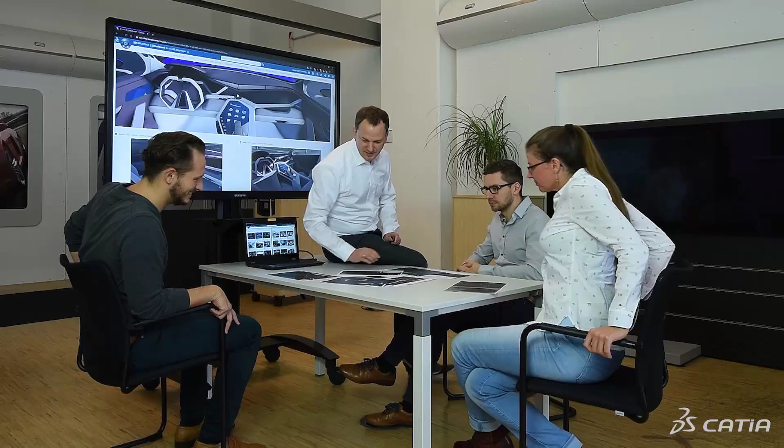When we take a look at modern transportation, we see more than just cars. It is not only about driving or being driven. Autonomous driving, electric mobility, artificial intelligence, those are the topics of the future. A future we want to shape with our Bleu iX Polymorph concept.

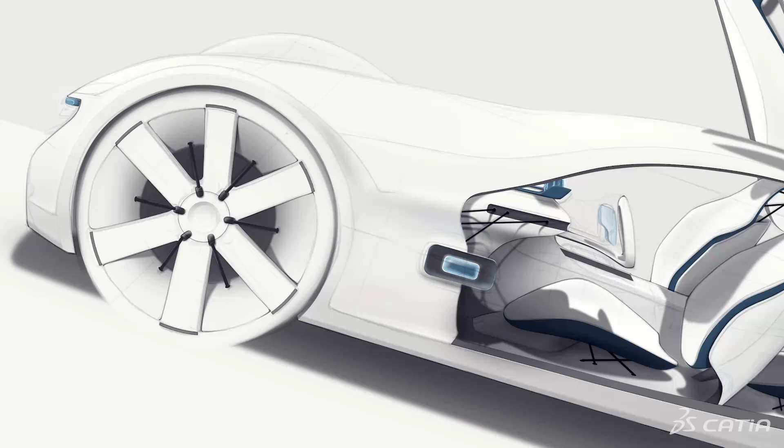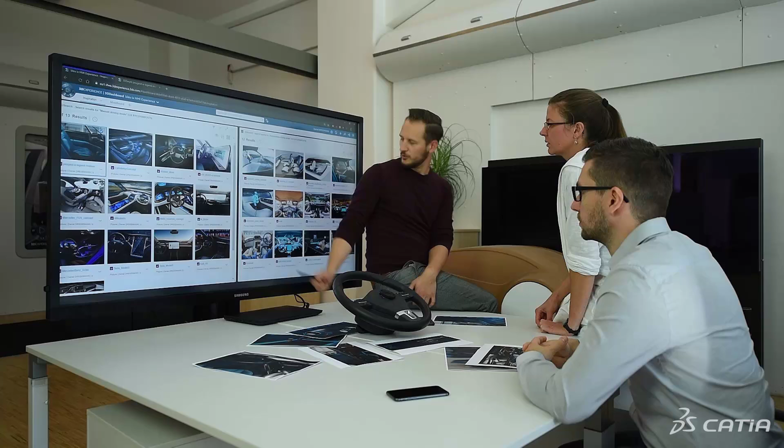Following the hybrid approach of having an autonomous and manual driving mode, we started to explore our ideas. 3DSwym dashboards are one of many tools which helped us to share our thoughts and inspirations easily. We gathered a lot of ideas in brainstorming sessions, so it was essential to have a platform that allowed us to share, organize, and just picture our inspiration. It helped us to collect feedback, make early decisions, and form a common idea about what we want to achieve.

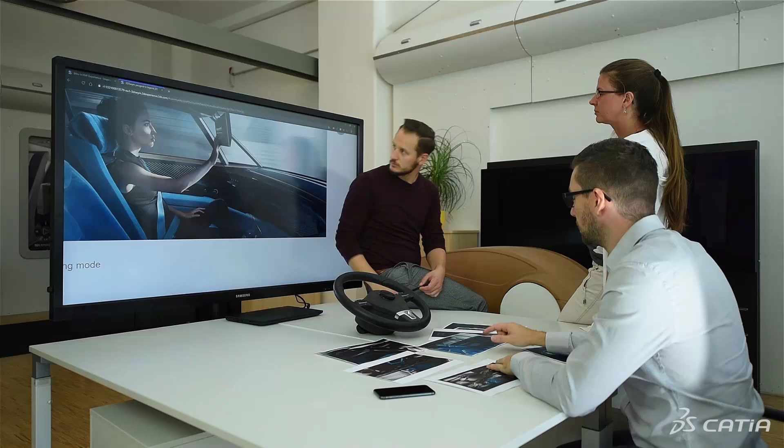With the 3DEXPERIENCE design solutions, we are able to explore a lot of ideas and to find the right alchemy of creativity and technical components.

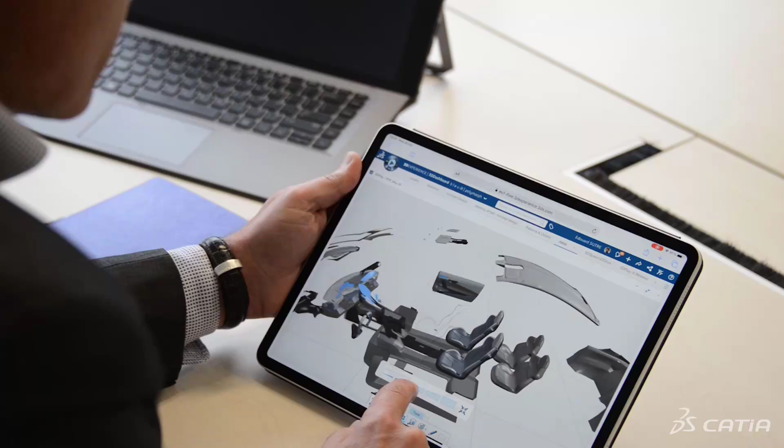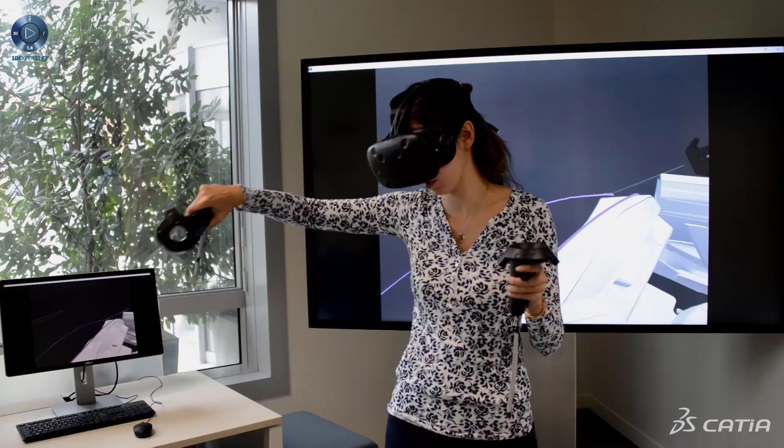It all starts with a natural language of sketching in 3D to explore ideas and express creativity with an ultimate gesture-based design paradigm. Working in a unified modeling environment made it easy and efficient to start sculpting the ideas with powerful virtual clay modeling.

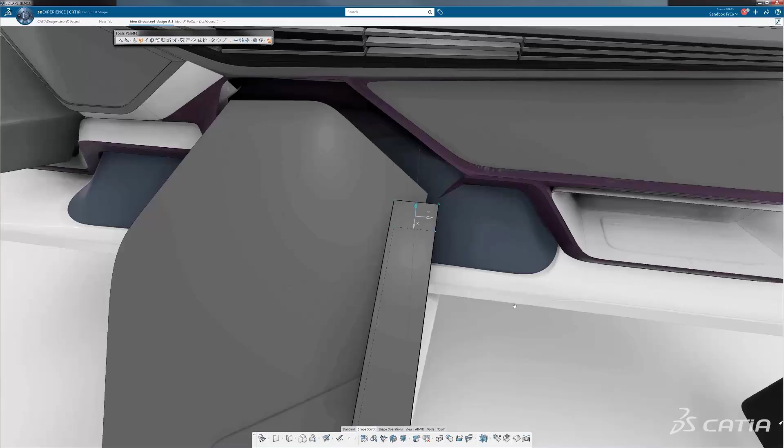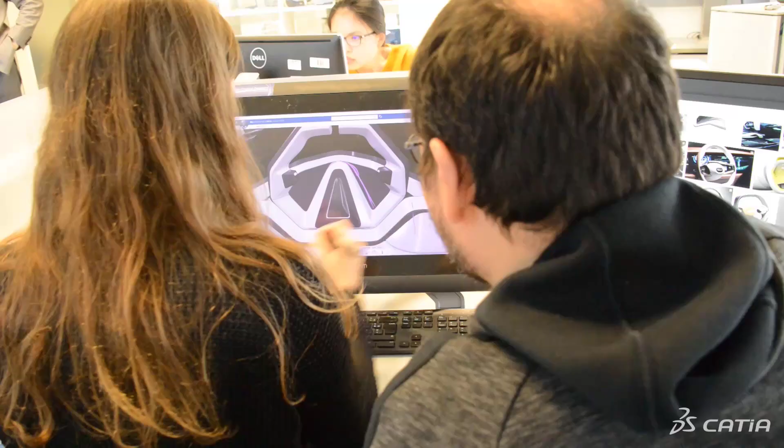Iteration loops between creative designer and concept modeler was then smooth to speed up the design convergence. For us, as designers, new generative modeling approaches were key to unleash our creativity to explore and generate multiple shape patterns.

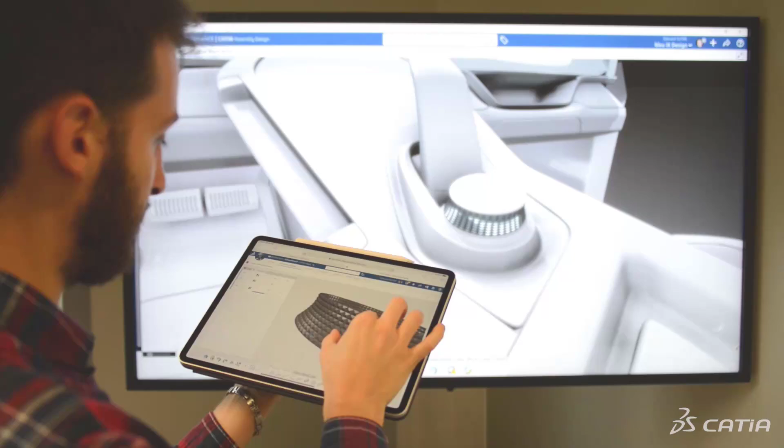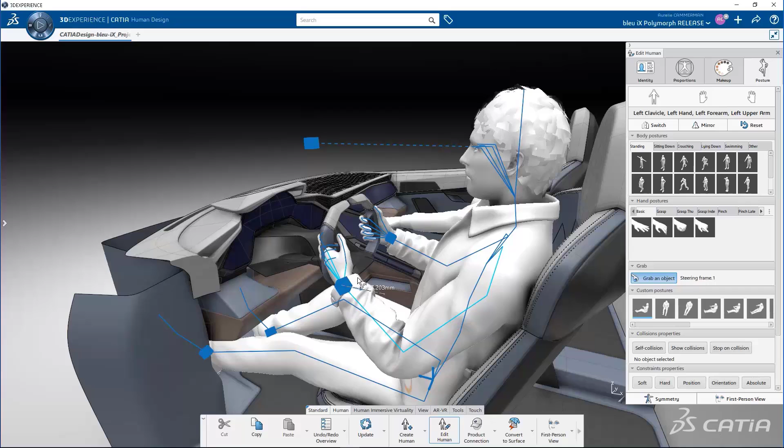In the Bleu iX Polymorph project, being able to visualize and contextualize a virtual human all along the design process was incredibly useful to design the right experience and reach the perfect design to offer the best consumer experience.

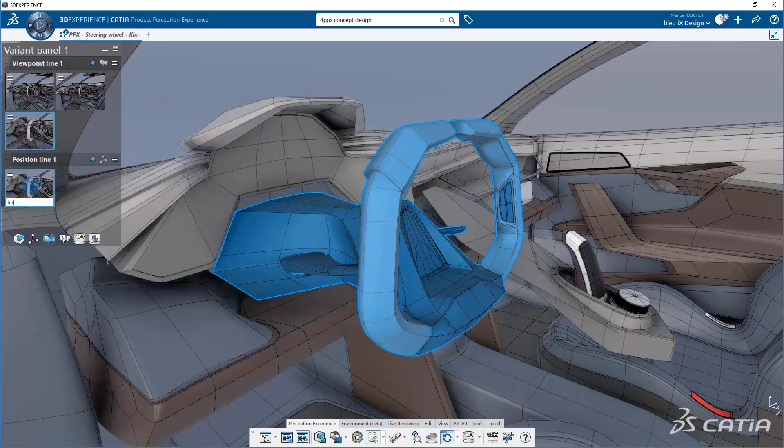Entering the 21st century, mobility is now evolving rapidly. Autonomous vehicles, along with electrification and sharing, appear to be the next big change in the field of mobility. This is redefining the way people will live their mobility experience. A new challenge for interior design.

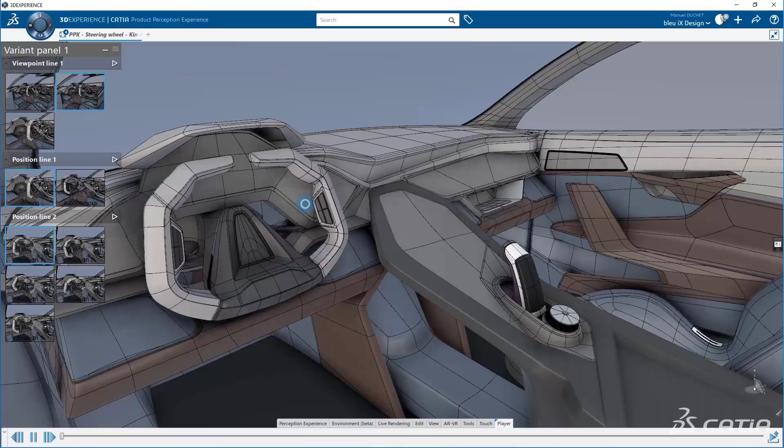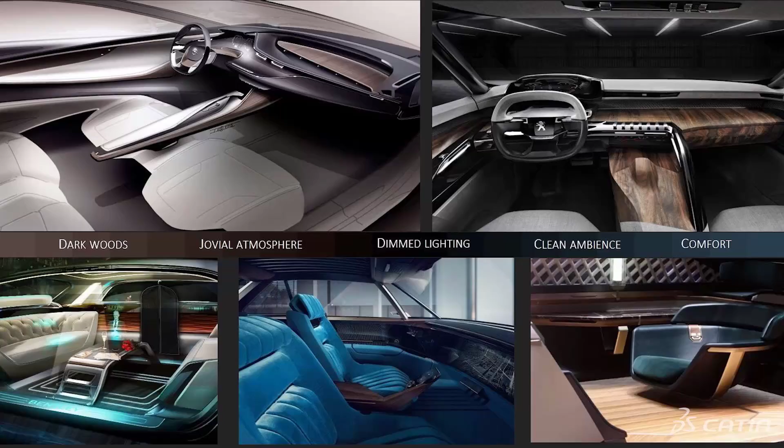The first and maybe most important step is always inspiration. We wanted to combine an aerospace-inspired sports car with an autonomous driving concept, so we had to think differently. The challenge of our design was to find a fusion of performance and comfort. A feeling of power, but also a place where you could relax. In the end, our choice of materials and colors was driven by exactly this idea.

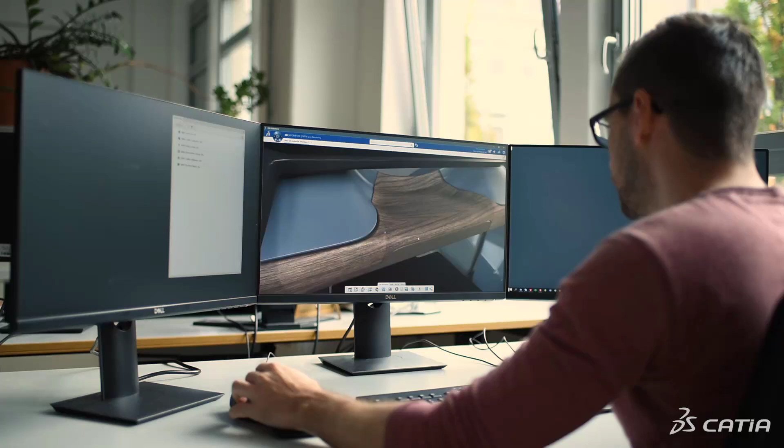To get there, it is very important to experiment. Be able to test different finishes, surfaces, or even small details like stitches on seats or the steering wheel. A big part of this ideation process is actually playing around, finding that certain something that really hits the essence of our design.

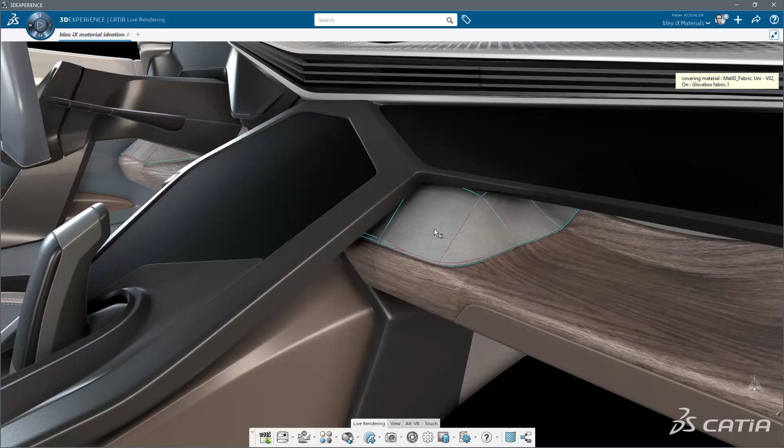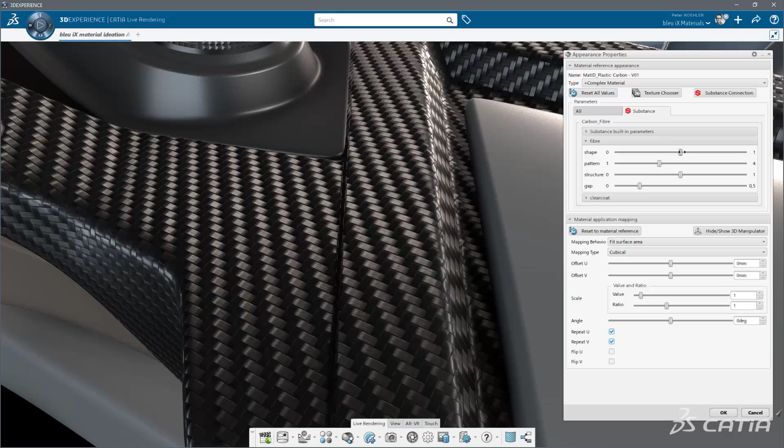We have excellent libraries of materials which allow us to do exactly this. They are physically based, so we can use them in different render modes, and fully procedural, so we are able to create hundreds of different variations in order to find the very single result we are looking for.

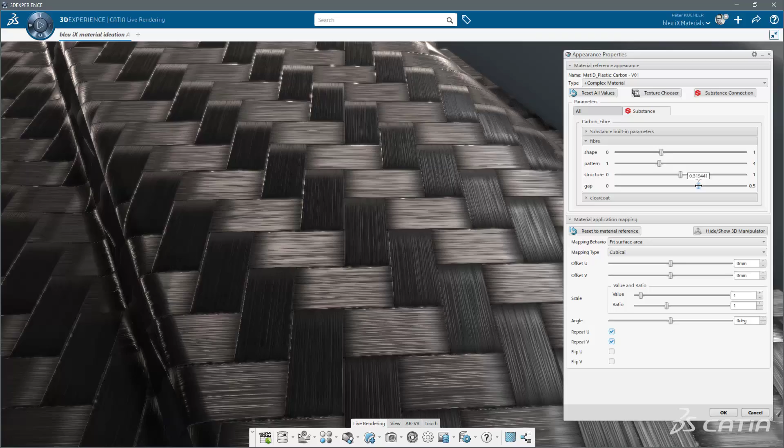The challenge was to bring multiple light sources, direct and indirect ones, into a balanced lighting that matches perfectly with large HMI displays and the initial material concept.

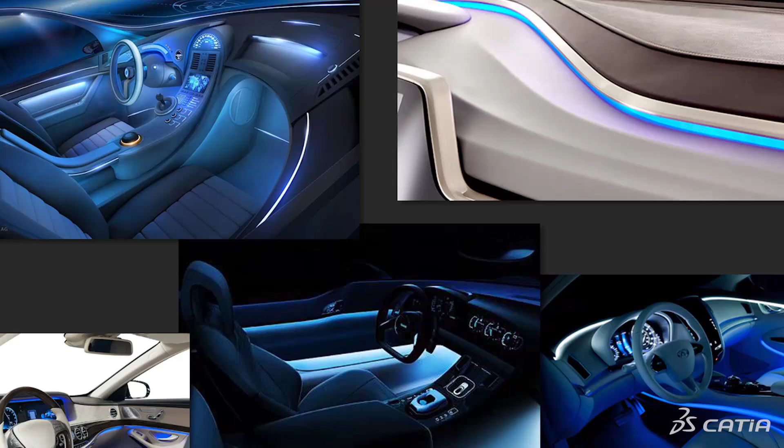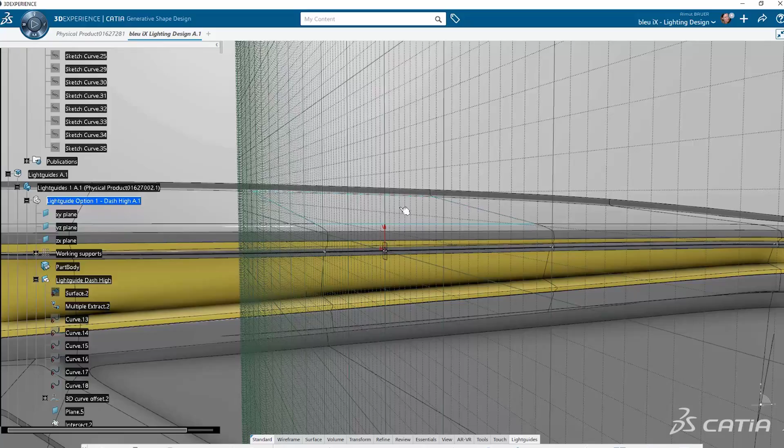To bring inspirations to life, first ideas have to be communicated to the shape designer. Thanks to Natural Sketch, I was able to draw light strokes directly onto the geometry. Due to constant evolution of the design, working associative and parametric is essential. All modifications on the light guides are immediately visible in the rendering.

Aligned to the material designer's concept and in coordination with the HMI designer, a harmonious color palette has been developed and brought to life with renderings and global illumination.

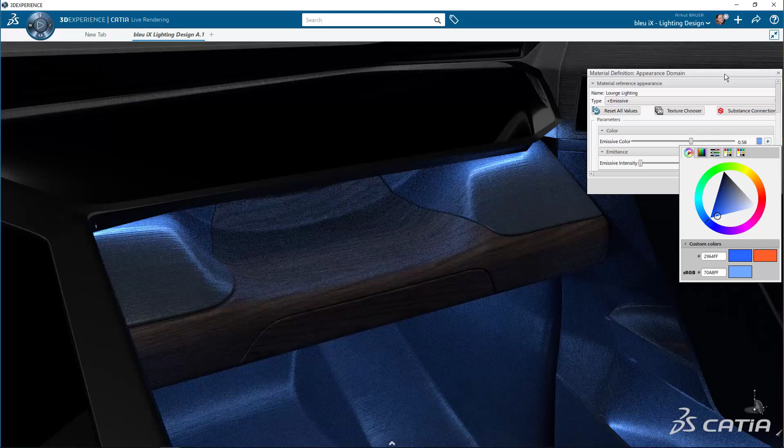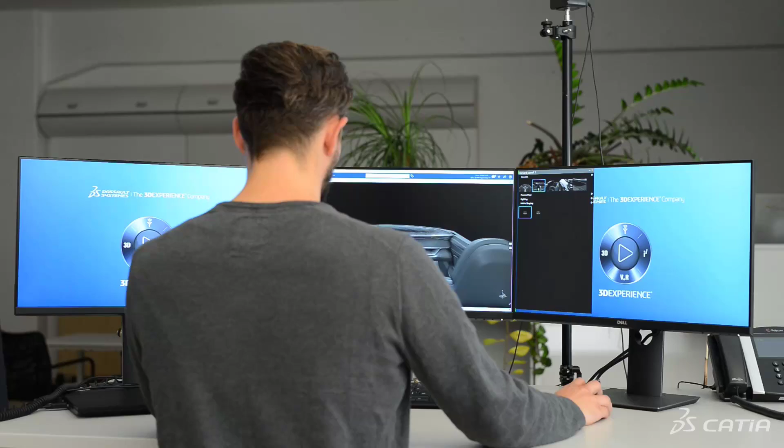In our daily life, we are surrounded by displays. We find them everywhere in all life situations. We had that in mind for our human-machine interface concept. We started working in 3D very early. Exactly this gave us a very good understanding of position, size and orientation of our screens.

It also allowed us to influence the shaping from the very beginning. Despite the fact the initial HMI innovation is driven by the customer's expectation, we began to integrate all disciplines directly from the start.

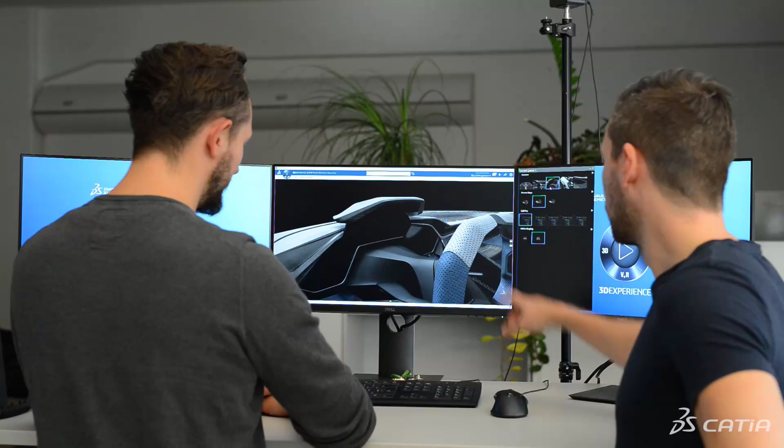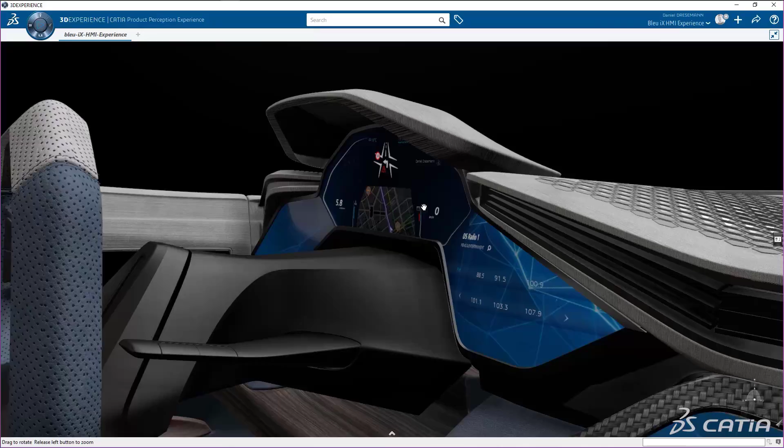Efficient collaboration is mandatory when it comes to creating a convincing experience. So we used inputs from color and trim and light designers in the whole evolution process of an HMI design. Directly integrating the first HMI sketches into our 3D interior got us a realistic impression of our complete experience.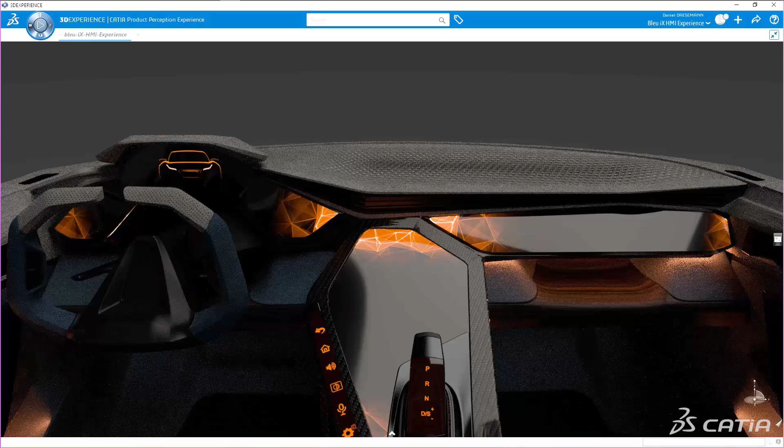The point at which our vision becomes visible as a whole, with all its complexity, materials, lighting, and rendered in high quality, that is a very exciting, if not one of the most exciting, moments.

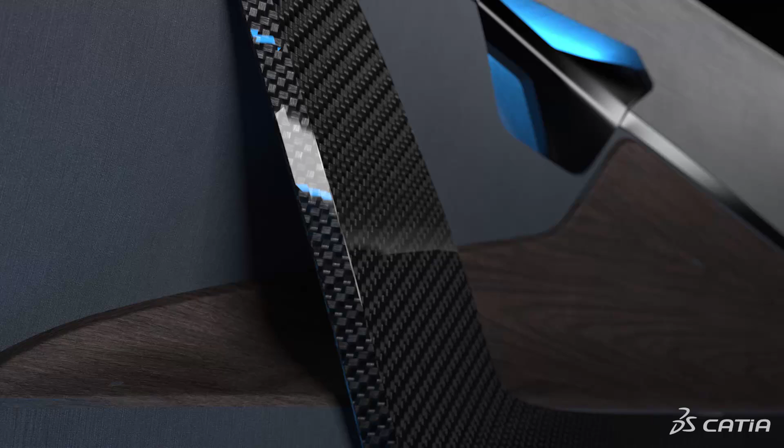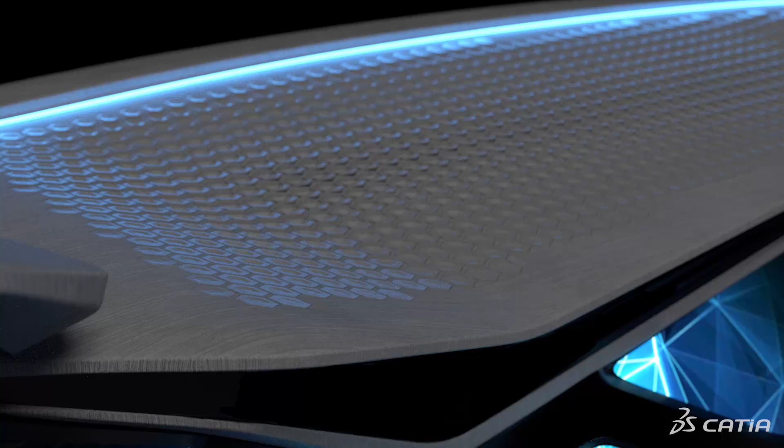This is when finally everything comes together. Shape design, materials, interior lighting and HMI. Visualizing our vision in this quality makes design and especially communication of design so much easier. There's less space for interpretation and therefore less space for miscommunication. Because in the end, it is important that everybody shares the same idea of design, the same vision.

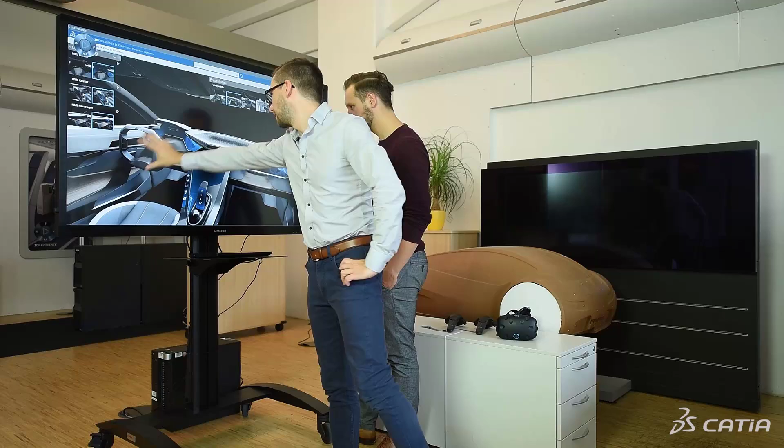In the end, design comes down to one very single point, which is we have to make decisions. Fortunately, with CATIA, we have the right tools in place to present our complete ideas with all points of discussion, variations, everything together in one single review session, on desktop, in front of a presentation screen, or even in VR.

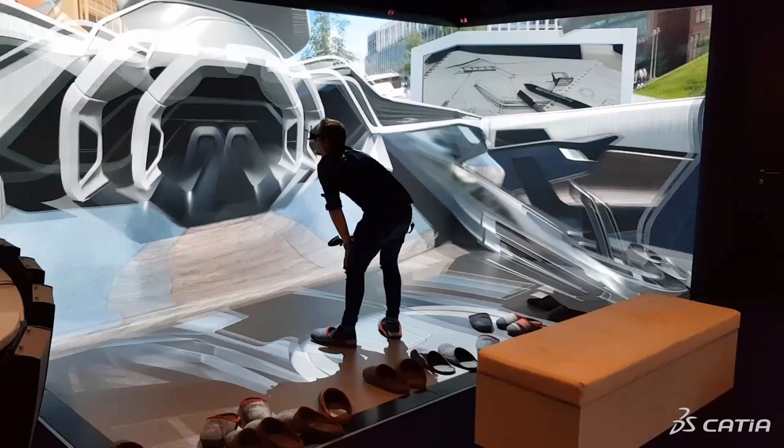Jumping between viewpoints, configurations, or even animations. Capturing decisions for future sessions, creating packages, or generating images.

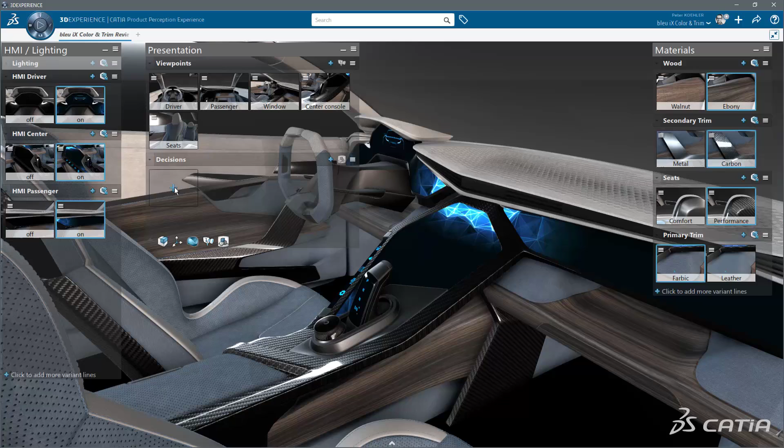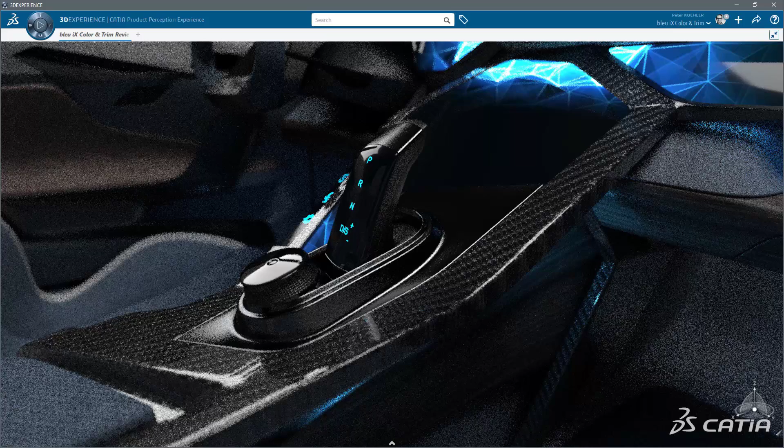The 3DEXPERIENCE platform allowed us to collaborate on live data at any time. Thanks to this, we were able to review the entire design in one single experience. It's not just watching a design, it's more than that. It's experiencing.